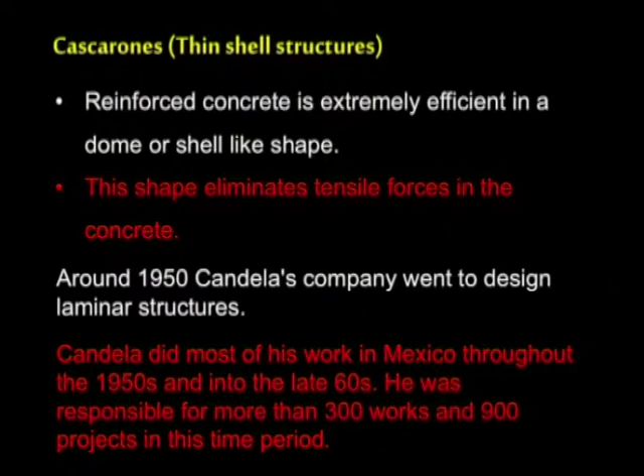So, around 1950, Candela's company went on to design laminar structures. Candela did most of his work in Mexico throughout the 1950s and into the 60s. He was responsible for more than 300 works and over 900 projects in this time period. Let's look at one of his famous works. His first famous work is called the Pavilion of Cosmic Rays. It's located to the south of the National Autonomous University of Mexico. Currently, it's in the same good condition in which it was proposed.

The Pavilion of Cosmic Rays is proposed using a double layered curved warped roof structure instead of a cylindrical structure, which was originally projected by architect Jorge González Reyna.

The initial projection of this project was a cylindrical structure, like a vault-like structure, a catenary vault-like structure, where the structure itself will have half of a cylinder and this half cylinder will have a single curvature. That was what was proposed by architect Jorge González. But later Candela came and changed the form to a hyperbolic paraboloid.

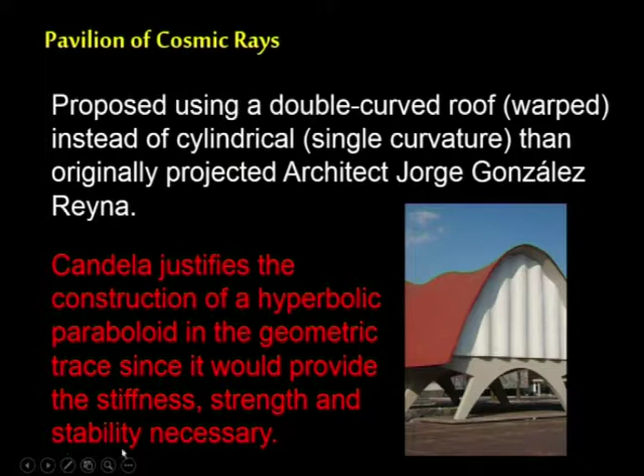He justifies the construction of a hyperbolic paraboloid in the geometric trace since it would provide the stiffness, strength and the necessary stability that the structure needed. So, he is talking about three major components here. He is talking about stiffness, strength and stability. They are three different things.

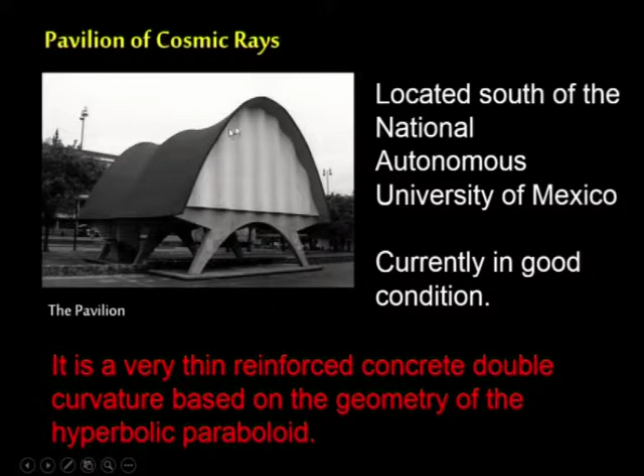Often stiffness, strength and stability are confused with one another, but Candela clearly differentiates these three things, and he thinks that only the use of the double curvature, the one curvature over here and another curvature over here, only by the use of these two curvatures in the single building, he is able to achieve all the three components which he mentions: stiffness, strength and stability.

The shell is 12 meters long and 10.75 meters wide. The cover of this laboratory, specializing in the measurement of neutrons, should respect the condition of not exceeding 15 millimeters thick at its highest point to fulfill its role optimally. Access is via a reinforced concrete staircase leading to the first bay of the building, where there is a lobby that connects to an external cubicle and two laboratories.

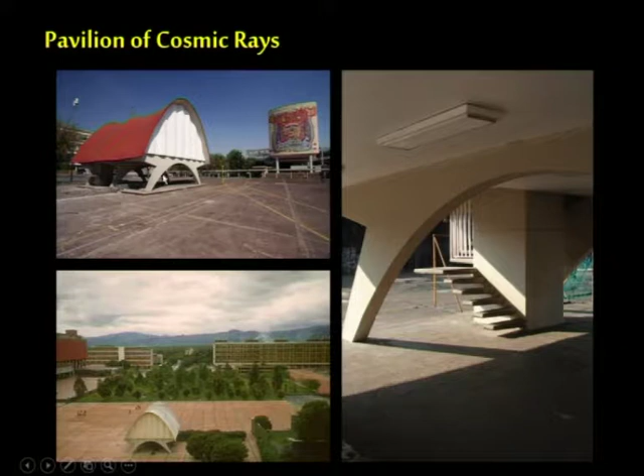The pavilion consists of a foundation based on an isolated footing which leads to two bays from the three rigid frames of reinforced concrete columns that clearly divide the space into two. There are three frames, 1, 2 and 3, which clearly divide the space into two. The one space is over here and another space is over here. So, clearly there are two bays which are formed from the three rigid frames of reinforced concrete.

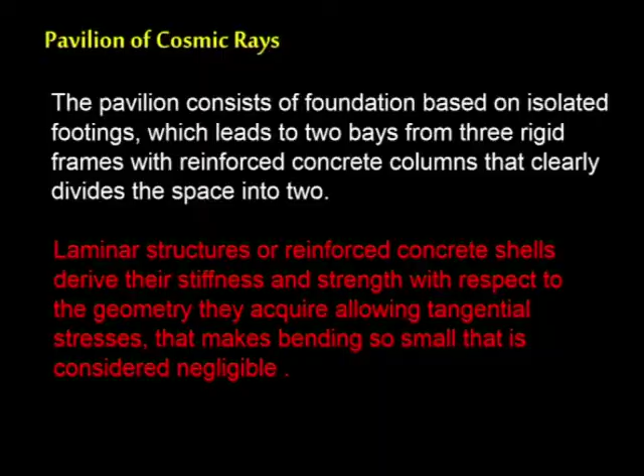The laminar structures or reinforced concrete shells derive their stiffness and strength with respect to the geometry they acquire by allowing tangential stresses that make the bending so small that it is considered negligible. There is practically no bending happening on the structures because of the tangential stresses which the whole structure allows for. So, that is why the bending stresses are considered negligible, and that is what makes the structure very stable. Let us move on to the next project.

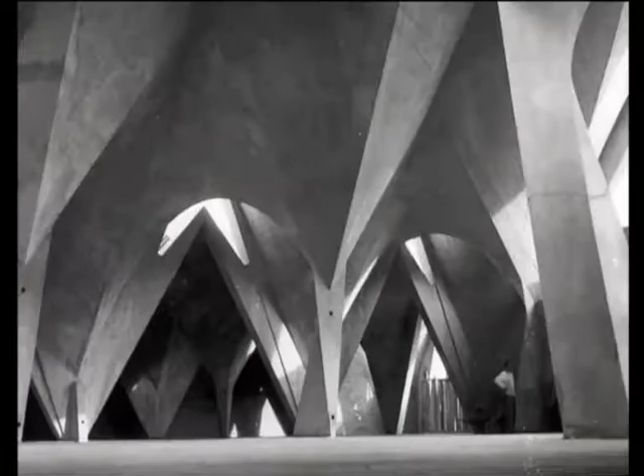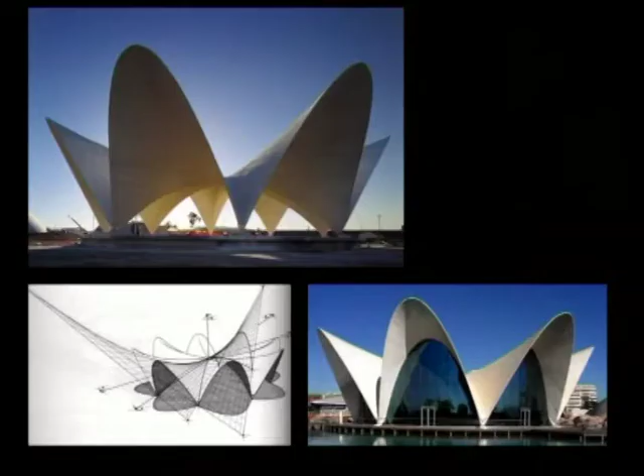These are some of the pictures of the interior of the structure, where he tries to use different kinds of support systems for the roof. Look at how complex systems of structure he has arrived at for the interiors. And this is the basic shell structure without the glass roof, how the building looks if there is no glass enclosure. On the bottom picture you see the glass enclosure provided with the setting and everything, but on the top picture we can clearly see how the actual structure behaves.

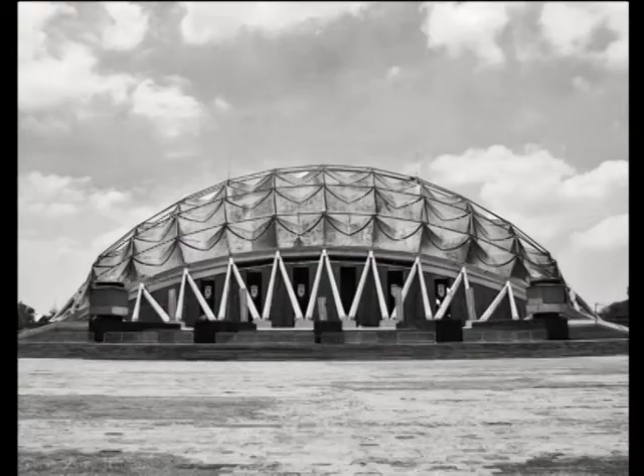We can see the point where the structure meets the ground. There are only a few points where the structure meets the ground, but still the whole concept is able to maintain the entire structure, the entire area, by a very minimal number of contact points, and this is the structural drawing of the building. These are some of the other buildings designed by Felix Candela. So, now let us move on to the next architect we are seeing today.

We will be looking at the projects, life and works of architect Eero Saarinen. Eero Saarinen was a Finnish American architect. He studied at the Cranbrook Academy of Art. He was the son of the influential Finnish architect Eliel Saarinen and his second wife Louise. He became friends with fellow students such as Charles and Ray Eames, and also Florence Knoll, with whom he later collaborated to create furniture and get it manufactured. Let us look at the early life and career of Eero Saarinen. He grew up in Michigan, where his father was a teacher at the Cranbrook Academy of Art.

He took courses in sculpture and furniture design there, and he also went on to study sculpture at the Académie de la Grande Chaumière in Paris. He then went on to study at the Yale School of Architecture. He completed his studies in the year 1934, and he became a naturalized citizen of the United States subsequently in 1940.

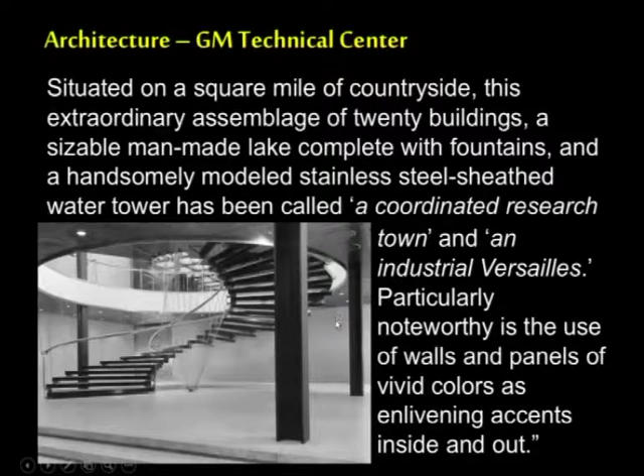Situated on a square mile of countryside, this extraordinary assemblage of 20 buildings and a sizable man-made lake, complete with fountains and a handsomely modelled stainless steel sheathed water tower, has been called a coordinated research town in itself, and it is also called an industrial Versailles. Particularly noteworthy is the use of walls and panels of vivid colors as enlivening accents inside and out.

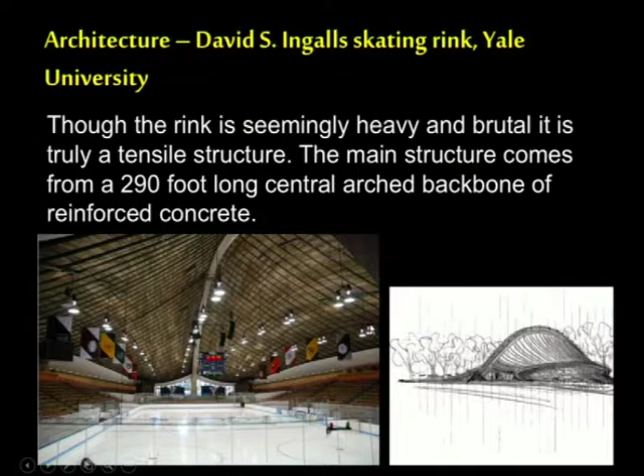Though the rink is seemingly heavy and brutal, it is truly a tensile structure. The main structure comes from a 290-foot long central arch which acts as a backbone of reinforced concrete. The central arch is this one, which acts like the backbone, and from there we have subsequent structural systems that carry the entire load of the structure. You see the central arch over here and the subsequent structural elements on this picture.

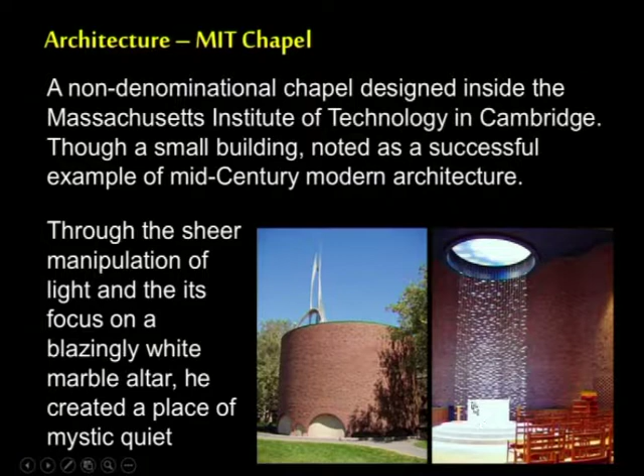That is all that creates the magic. From the outside, the chapel is a simple windowless brick cylinder set inside a very shallow concrete moat. It is 50 feet in diameter and 30 feet high, topped by an aluminum spire.

Saarinen chose bricks that were rough and imperfect to create the texture effect. Look at the texture that is created on the wall here when there is light being focused. This texture is created specifically by Saarinen to get the textured effect.

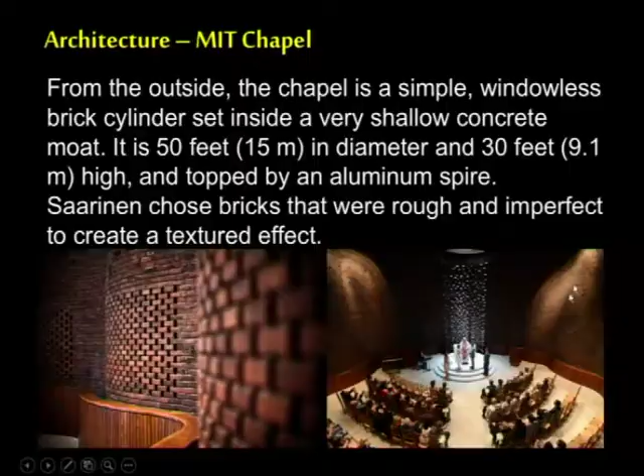The next important building that he designed is, of course, the St. Louis Gateway Arch. The Gateway Arch is a 630-foot monument in St. Louis. It is clad in stainless steel and built in the form of a catenary arch. It has many accolades to carry for itself.

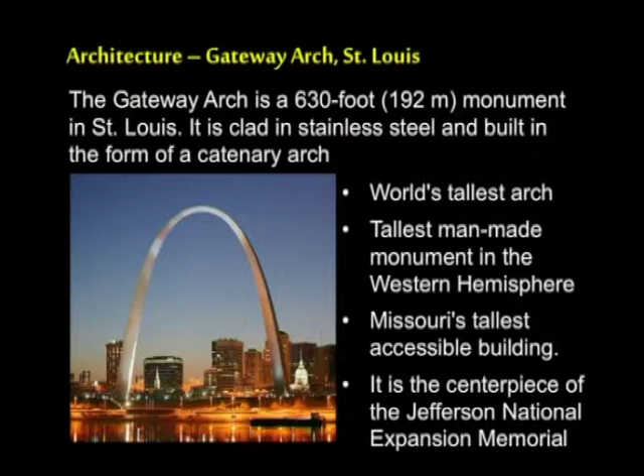It is the world's tallest arch, the tallest man-made monument in the Western Hemisphere. It is Missouri's tallest accessible building. It is the centerpiece of the Jefferson National Expansion Memorial. A soaring curve in the sky that links the rich heritage of yesterday with the richer future of tomorrow brings a new purpose and a new sense of urgency to wipe out every slum. That is what the building is described as.

The architecture study about Eero Saarinen is never complete without the study of the TWA terminal. TWA terminal is also called the Trans World Flight Center. Although it was opened in 1962, it was abandoned later. Portions of the original complex have been demolished, but the Saarinen-designed head house has been renovated and it is partly encircled by a replacement terminal building.

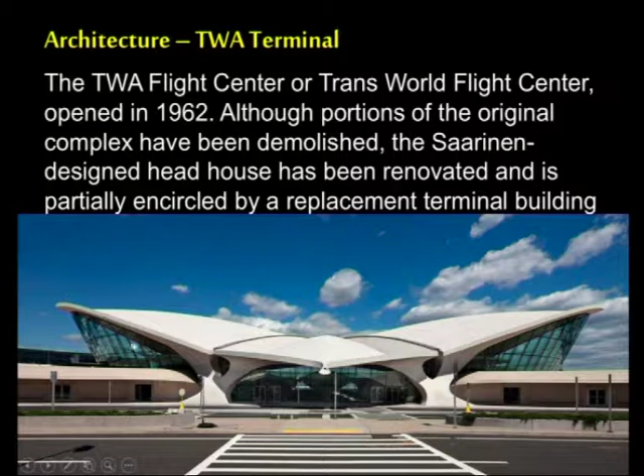The building that you see here is shaped like a bird taking flight. The bird with a beak, with its two legs and claws, with its wings on either side, ready to take flight. How interesting is this form, especially when you want to design an airport terminal building. You take the inspiration from a bird just about to take flight, and then you design a beautiful building with that as your inspiration.

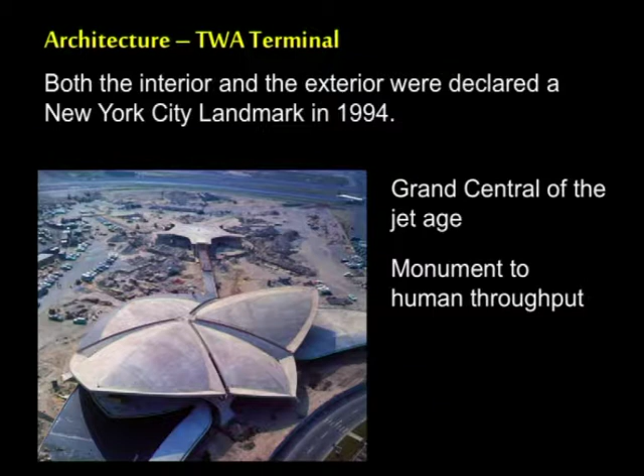It is so beautiful that both the interior and the exterior were declared a New York City landmark in 1994. It is called the Grand Central of the jet age, and it is also called the monument to human throughput. The prominent wing-shaped thin shell roof over the head house or the main terminal is the one that catches the eye of any observer. The unusual tube-shaped departure-arrival corridors were originally wrapped in red carpet.

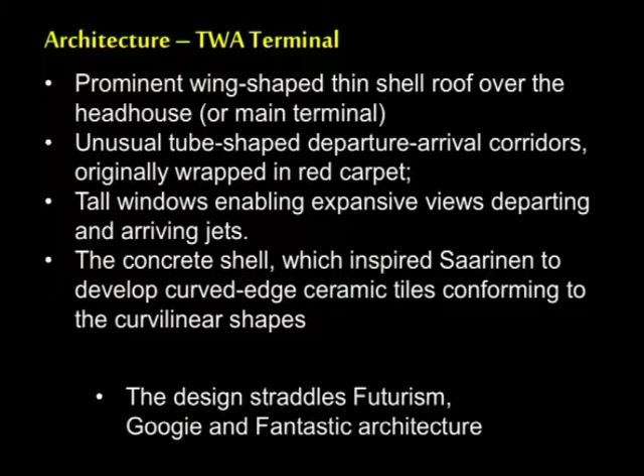Tall windows enabling expansive views were provided to view the departing and arriving jets. The thin concrete shell, which inspired Saarinen to develop curved edge ceramic tiles conforming to the curvilinear shape, was specifically designed for this building. This building straddles many styles of architecture, such as futurism, googie architecture, fantastic architecture. This particular architecture style which Eero Saarinen followed is also called neo-futuristic expressionism.

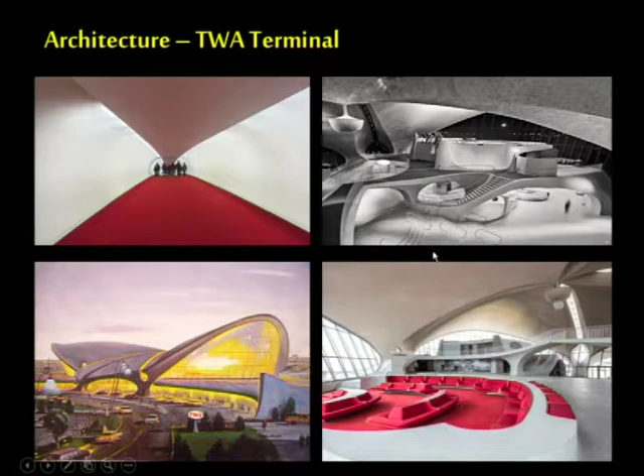Explain with sketches. With this, we come to an end of lecture 8 of the series, and I look forward to meeting you in lecture 9 with another master, famous designer, and a lot of other complex structural principles. So, thank you.